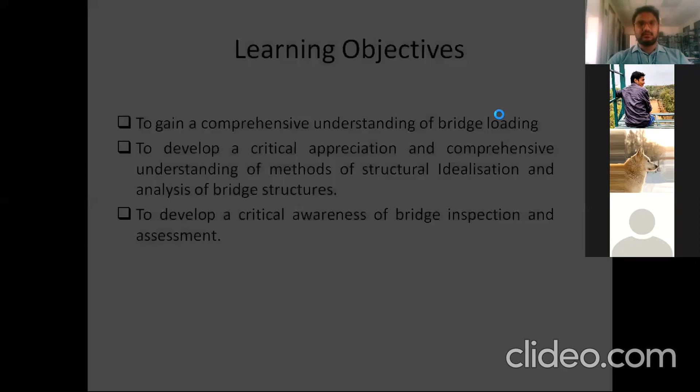The learning objectives I would like to share today: through this course, we can gain a comprehensive understanding of bridge loading, and develop a critical appreciation and comprehensive understanding of the methods idealized in structural engineering, so you can analyze bridge structures. We will also develop a critical awareness of bridge inspections and assessment. By having these principles of bridge engineering, you will have awareness of how to do inspection of bridges, how to assess bridge structures, bar bending schedules, rebarring of bridges, and the structural elements of construction.

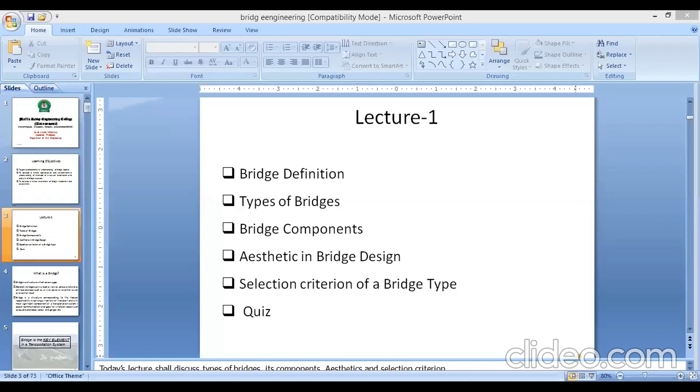So in today's lecture, we'll have the definition of bridge engineering, what are the different types of bridges available, bridge components, aesthetics in bridge design, and the selection criteria of bridge type - on what basis we are going to select bridges. Finally, we will have a quiz question, and through that our lecture will be finished.

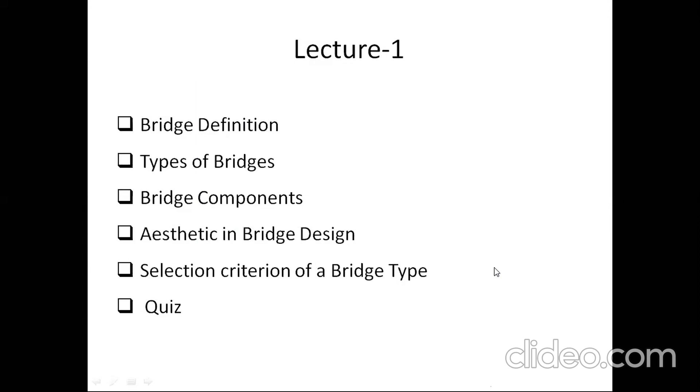What do you mean by bridge? How do you define a bridge? A bridge is a structure which covers a gap. Generally, a bridge carries a road or railway across natural or artificial obstacles. So a bridge is a structure which covers the gap and acts as a medium laid over an obstacle, such as a river, canal, or other railways or roads. That is how a bridge covers a gap.

A bridge is a structure corresponding to the heaviest responsibility, which carries a free flow of transport also. So bridge plays a vital role in terms of transportation, such as in case of communication, or covering gaps of different obstacles like valleys and gorges. That is how bridge plays a vital role in terms of transportation.

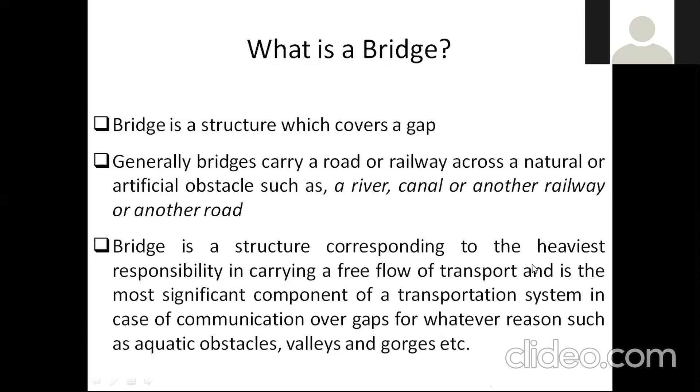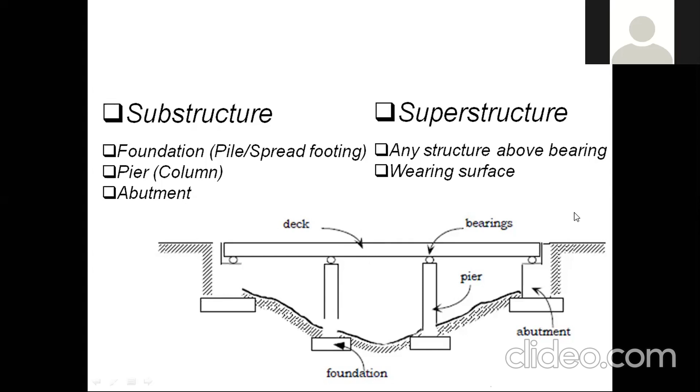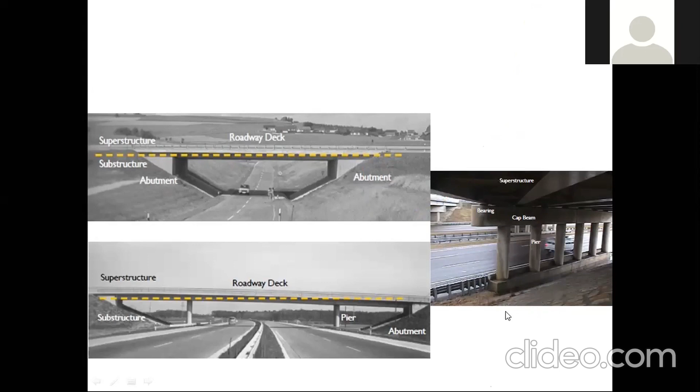This is called a pile cap. Below that, you might have a pile or you might have a raft. If you have a raft below the ground, it will be called a raft cap.

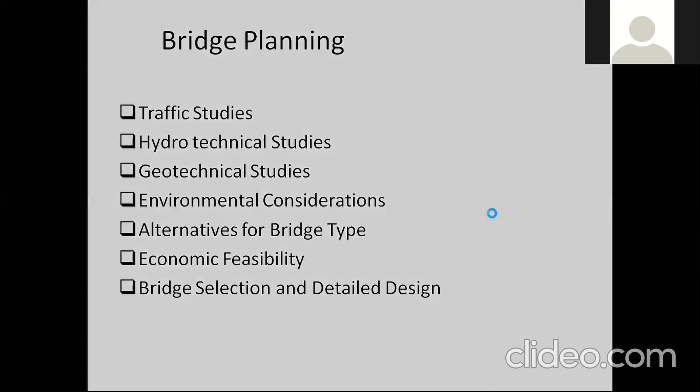So here you can see - this is very important.

Medium span is 30 to 100 meters, and long span is greater than 100 meters. Bridges having less than 6 meters span are treated as a culvert, and spans greater than 6 meters are treated as bridges. So all our culverts will have a span less than 6 meters, whether it's a box culvert, pipe culvert, single cell, or double cell box culvert.

So in that way, culvert is defined as having a span less than 6 meters. Bridges are classified based on the span also.

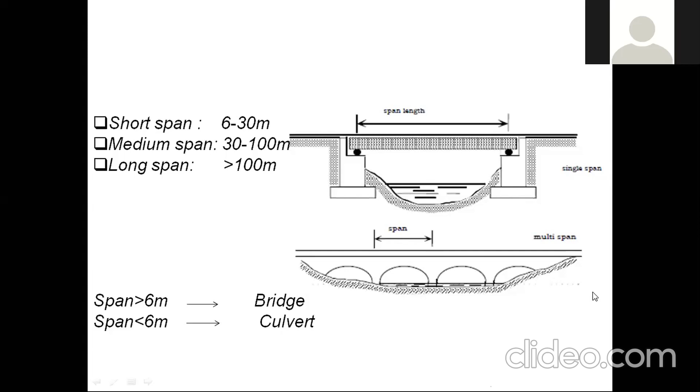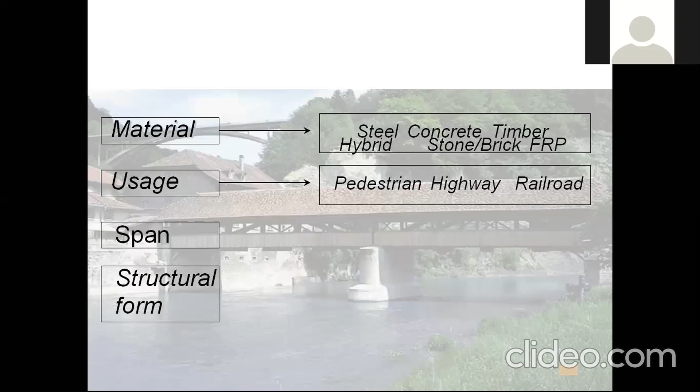The other one is usage. Based on the usage, you can call a bridge by different names - pedestrian bridge, highway bridge, railway bridge, river over bridges, and so on. Based on the span, you can classify bridges as short span, medium span, and long span bridge.

Coming into structural form, bridges are classified based on the structural form. If the bridge has only a slab without a girder or any beam, it's called a slab bridge. There will be a girder bridge, truss bridge, arch bridges, suspension bridges, cable stayed suspension bridges. These all come under the structural form.

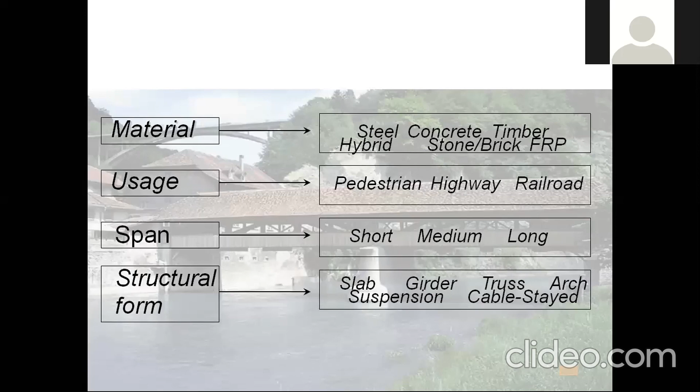See the material and fabrication. The materials used, as I mentioned, include masonry, timber, naked timber bridges, RCC, and pre-stressed concrete bridges to have long spans. Steel you can use, and composites also you can make use of to have a bridge.

What do you mean composite? It's a combination of steel with concrete. Apart from rebarring steel, you can make use of steel sections with the concrete to make a composite structure. And coming to fabrication, it can be done in the form of pre-casting bridges and cast in place, where the bridge construction takes place at site.

There are also pre-tensioned bridges, post-tensioned bridges, prefabricated bridges, and riveted bridges, where the bridge is going to be a permanent, bolted structure like steel and timber. So that is how, based on fabrication and materials, your bridges are classified into different types.

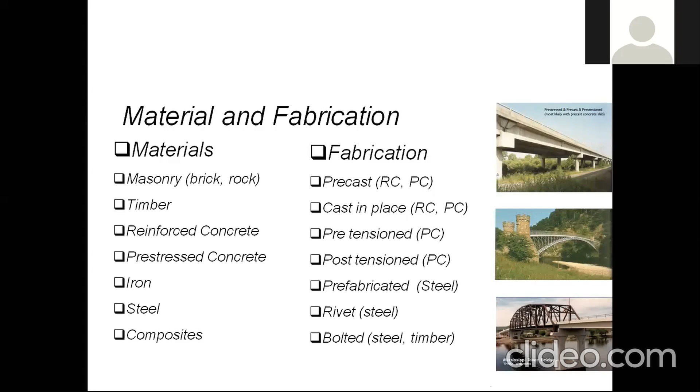And coming to highways, see these are examples of the highway bridges. This is how highway bridges look like.

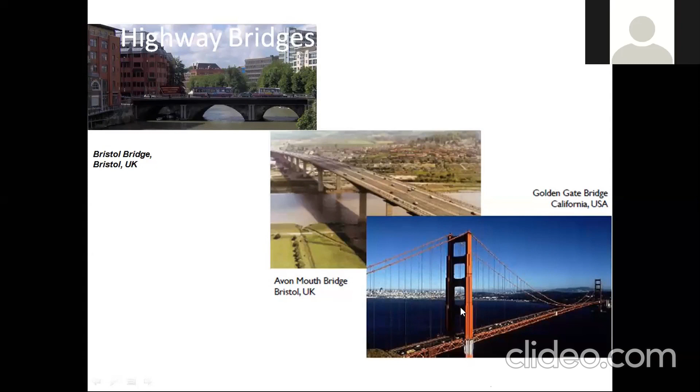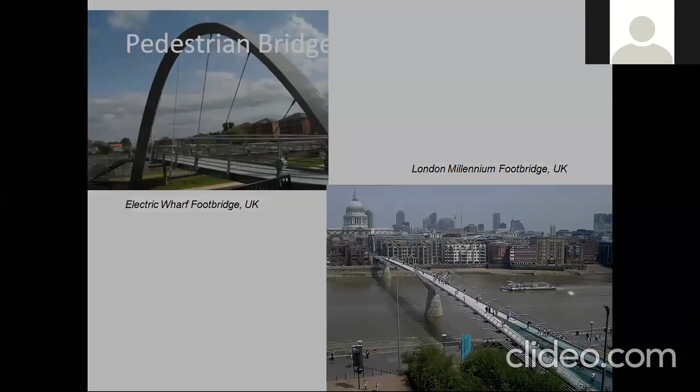Right, see the next one. So this is the pedestrian bridge. You can see the pedestrian walk bridges like this. These are a few examples of pedestrian bridges and railway bridges.

Railway bridges. So here you can see the steel railway bridge. At the bottom line, you can see this masonry stone arch bridge.

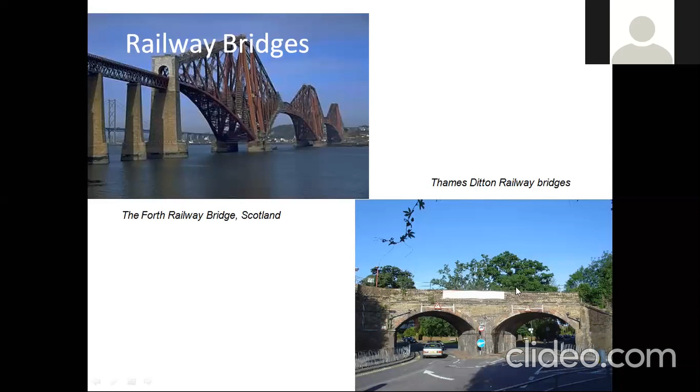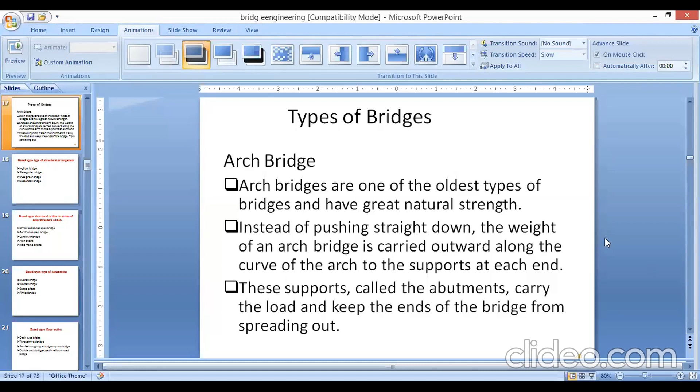Beam bridge - there will be a beam which is resting, which is supporting your deck. That is called a beam bridge.

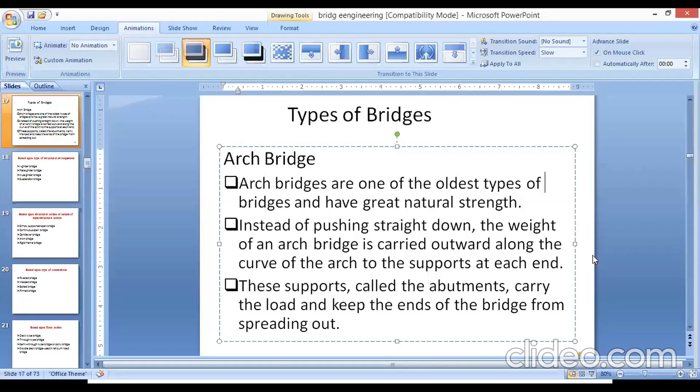From the crown portion, the load transfers to the support in the form of an arch action. The supports are called the abutments, where the load transfers to the foundation. In arch action, loads transfer to the abutments right away, which carry the load and keep the ends of the bridge from spreading. That is basically how arch bridges look, and how they transfer the load.

Based upon types of structural arrangements, bridges are arranged into I-girder bridge, plate girder bridge, truss girder bridge, and suspension bridge. Basically, bridges are classified into different types based on different categories, or different types of functionalities. The first one is bridges classified based on the type of structural arrangement - how you arrange the structure, all based on its application.

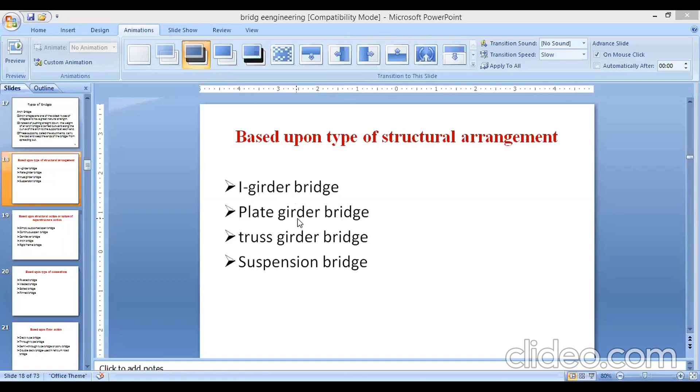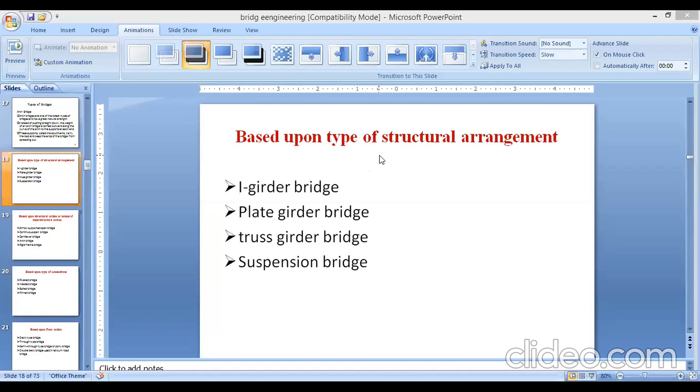Let's see the I-girder bridge. This comes under steel structures, where I make use of an I-steel structural element as a girder. In plate girder bridge, you will study this as your fourth module in steel structures, where you'll learn how to design the plate girder. The truss girder bridge is a composite structure having different truss, strut, and tie members. And the suspension bridge - this is how, based on the type of structural arrangement, bridges are classified.

The next classification is based on the structural action, or nature of superstructure action. Based on the action also, bridges are classified. The first one is simply supported span bridge, where it is supporting on two supports. Continuous span bridge, where it is supporting on a number of supporting actions - if your bridge has different piers, it can be called a continuous span bridge.

A cantilever bridge, where one end is fixed - it can also be movable when you have a pin support at one end. If you have a fixed support at one end, it can't rotate, so it can also be called a cantilever bridge. And the arch bridge, based on arch action, and the rigid frame bridge. These are the different types of bridges available based on the structural action or nature of superstructure action.

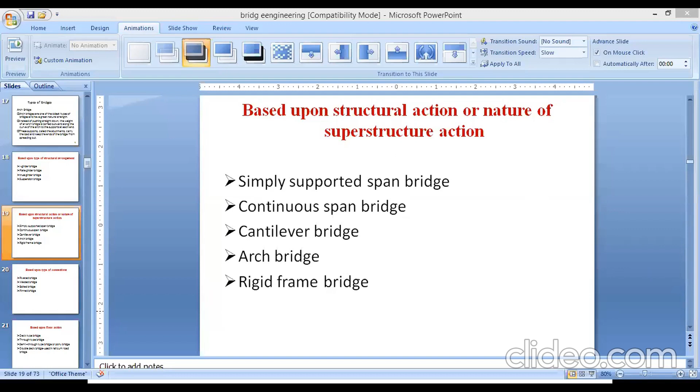Let's see the next one - based on the type of connections. As we are well aware of different types of connections, bridges are also classified this way: riveted bridges, welded bridges, bolted bridges, and pinned bridges. Riveted bridge is a permanent bridge, welded bridge is a permanent bridge, bolted bridge is a temporary bridge, and pinned bridge is a temporary bridge. Rivet and welding both are permanent, and bolting and pinned are temporary. That is how bridges are also classified based on the connection.

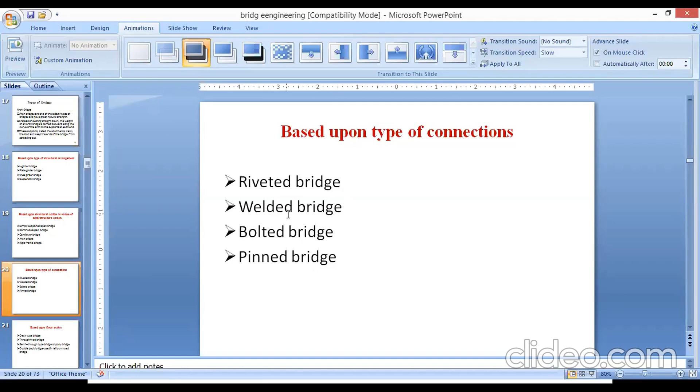Based on floor action - how your deck is subjected to load - bridges are also classified. One is the deck type bridge: if you have a deck alone, it falls as a deck type bridge. Through type bridge is where it allows passage from one place to other, so the bridge having access from one place to other place can be called a through type bridge. There's also semi-through type bridge, or pony type bridge - I will show you some pictures of how these look.

So in that way it's called a double deck bridge, which will accommodate both roads and railways. So in that way your bridges are classified based on the floor action.

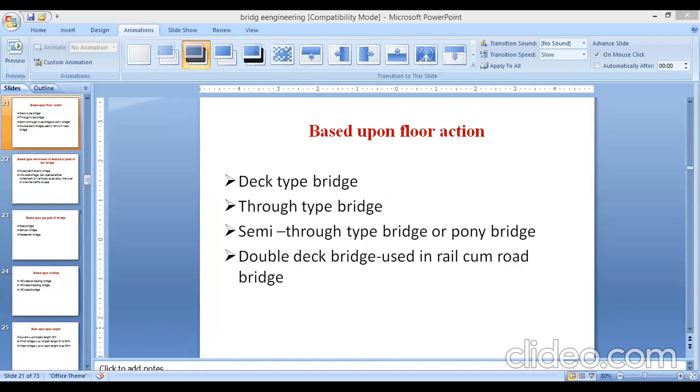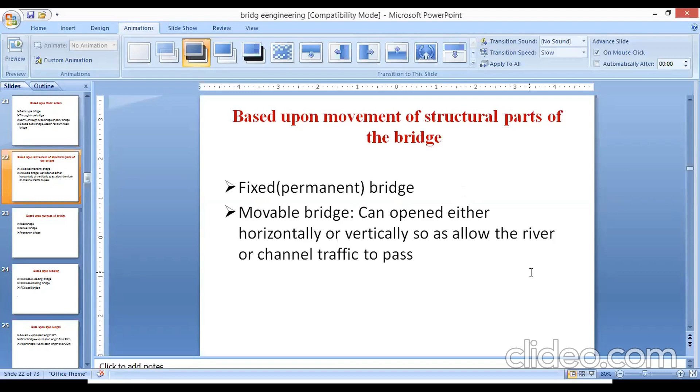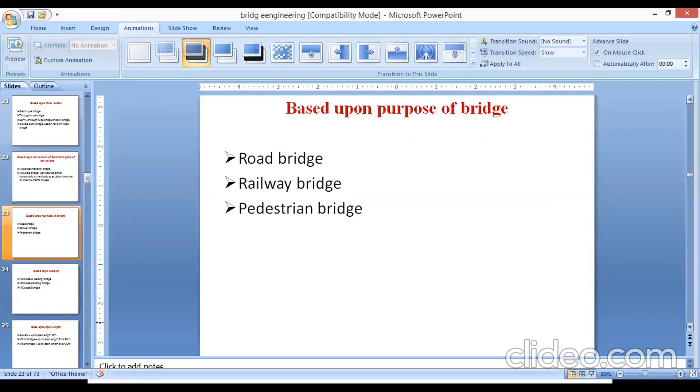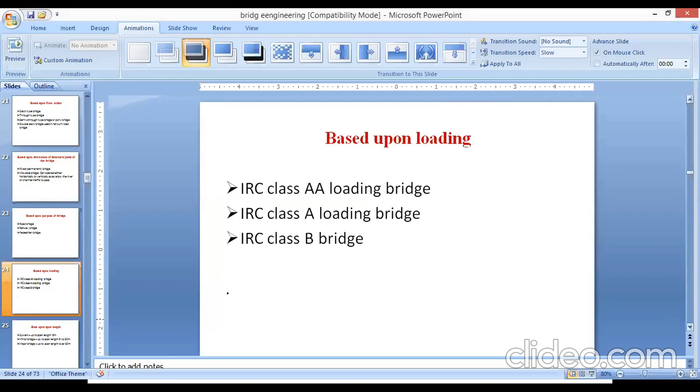So this is how bridges are basically classified. It's not just like a road bridge classified on simple function alone - it's based on span, based on function, based on usage, based on application. So bridges are classified on different factors. Now I would like to show you some pictures on each bridge.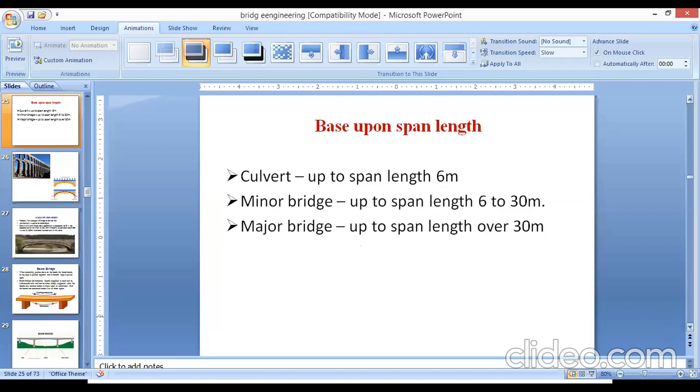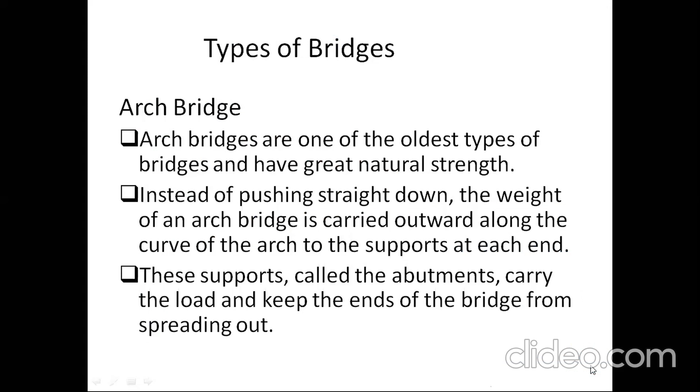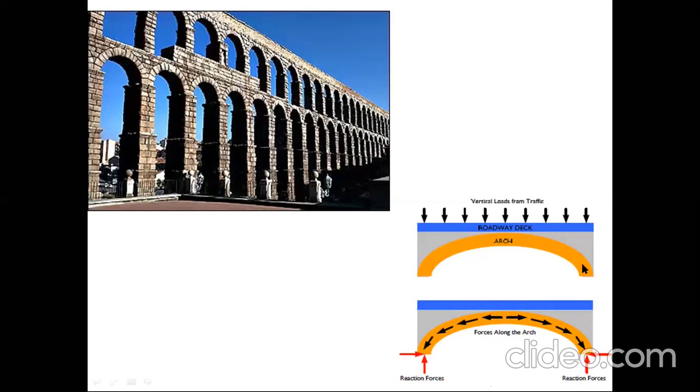Here you can see the arch bridge, where you can see the arch action of the bridge. You can see how load transfers from the arches to the abutments - forces along the arch, and this is the road deck. This load transfers to the arches, which carry the forces and transfer them to the abutments. So this is how arch bridges look.

And see the masonry archway. So this is the masonry archway. Basically, this masonry archway will have a span in and around 3 to 15 meters. This is probably the first category of bridge involved in olden days. These bridges are aesthetically superior to slab bridges, and even their look is very nice.

The arch-shaped slab supports on two opposite walls, and it can adopt earlier for small spans of 3 to 15 meters of its masonry action. So that is how you can even extend it up to around 305 meters in concrete, which has been built in the world. So even for half a kilometer of length, bridges can accommodate transportation.

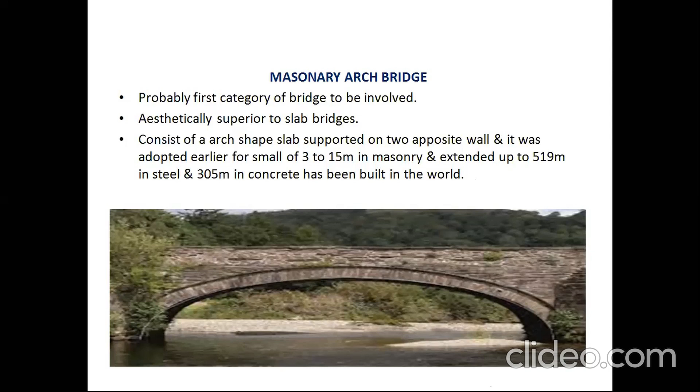And you can see the beam bridge here. So basically, you all know the beam action. The bottommost layers will be subjected to tension, and the topmost layers will be subjected to compression. That is how the beam action takes place for beam bridges.

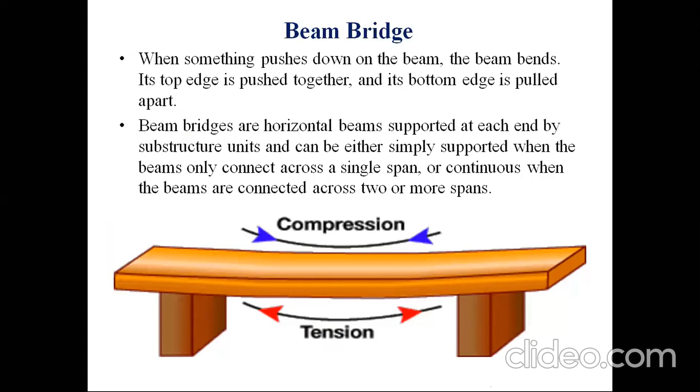So basically, in beam bridges, when something pushes down on the beam, the beam bends - the top edge is pushed together, and the bottom edge is pulled apart. That is how the beam action takes place. Not only in a single span bridge, but even in continuous bridges, the action will be the same, across two or more spans.

So let's see the next one, which is a beam bridge again. I think you've all seen these kinds of bridges. There are two piers and two abutments - actually, there are four piers here. This is called the pile base, and this is called the pile. Basically, piles will be below the ground. That is how the structure usually looks like, and this is the deck.

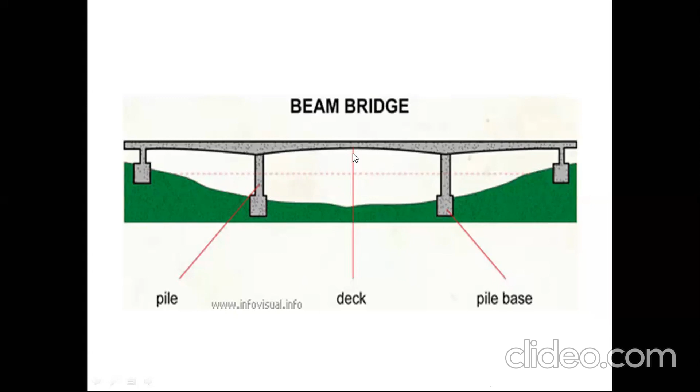And this is called a pipe culvert. We call these culverts where the span is less than 6 meters. You've all seen these kinds of culverts, right? The culvert usually will be with a pipe, or sometimes with a single cell or double cell pipe culvert. These culverts are suitable for cross drainage flow, so that is how people provide pipes for the cross drainage flow.

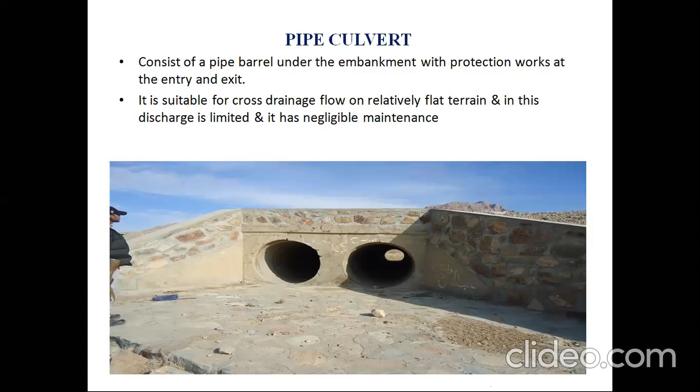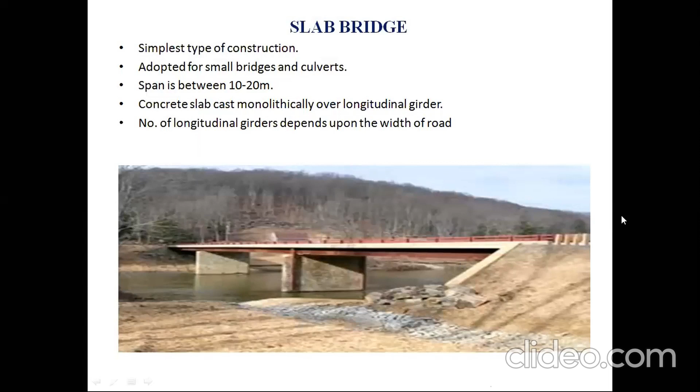And plate girder bridge - this is what we are talking about, which is related to your steel structure. This is something like a plate girder which has more depth. You can see a huge girder here, made up of an I structural element. This I section was prepared with the help of plates, forming an I section. Such a big member, having more web depth, needs to be stiffened with the help of a web stiffener.

You can see there are multiple stiffeners provided vertically. They are called web stiffeners, used to control web buckling due to shear. That is how the web is supported with web stiffeners throughout its longitudinal length. Basically, these plate girder bridges can accommodate a span of around 10 to 60 meters, and for continuous bridges, it can go up to a quarter of a kilometer, 250 meters, in continuous construction.

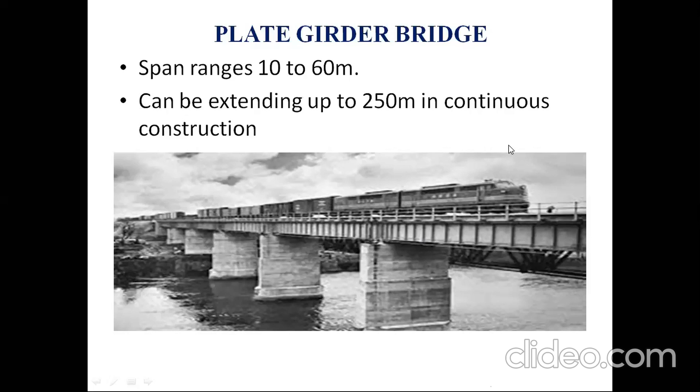And truss bridge - I think you can see the truss bridge here. The span can be 30 to 375 meters in the simply supported case, you can accommodate a truss bridge. See, up to around 550 meters without any support, you can have a truss bridge.

Here, each individual member is subjected to tension and compression. There are a lot of bracings on the top and even on the lateral sides of the section. And you can see the I section which is supporting the deck. So this is how the truss bridge looks like.

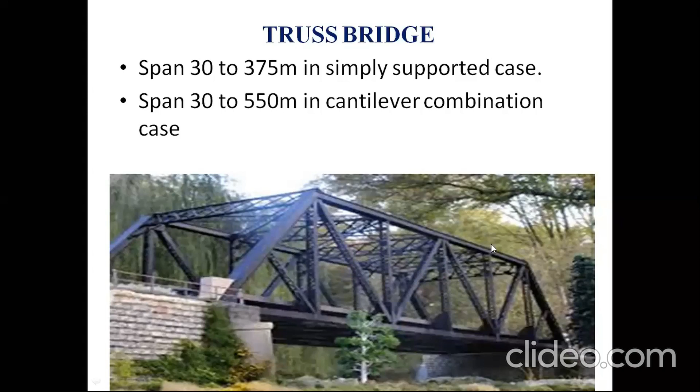If you are good enough in designing steel sections, you can even design truss bridges with that steel knowledge. All these elements seen here are laterally supported in the form of lacing - you can see the lacing for these sections here. So this is how the truss bridge looks like.

And the next one is suspension bridge. You all have seen this, right? So there is a big confusion between suspension bridge and cable stayed bridge. Both are different. Suspension bridges and cable stayed bridges are different.

So here the deck is completely suspended with the help of tension members. These members are called cable strands, and these vertical pylons are called stanchions. They are made up of high tensile steel cable strands in the form of a catenary, to which the deck is attached by steel suspenders, which are made up of steel rods or members or cables. That is how the bridge is supported.

So the bridge which was recently constructed in our Hyderabad, near Inorbit Mall, Durgam Cheruvu, is not a suspension bridge, it is a cable stayed bridge. So there is a difference between cable stayed bridge and suspension bridge.

So basically this suspension bridge can be made of timber or concrete, steel also can be used, where the load transmission takes place to the suspenders.

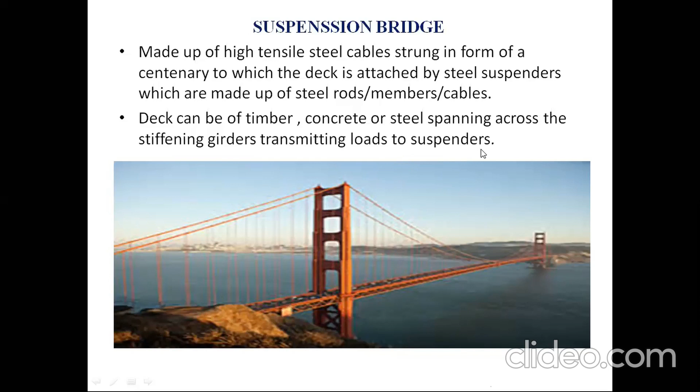See how the forces are transferred from stanchions to cable, from cable to strands, from strands to deck. You can observe here, every strand is subjected to tension, and even the major cable is also under tension. Your stanchion is subjected to compression, and your anchorage is also subjected to tension. So you can see a lot of elements here are all subjected to tension, only the vertical pillar is subjected to compression.

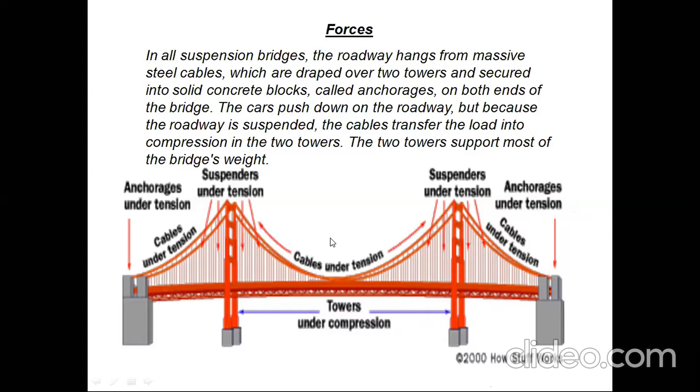So even you should know the load transformation in the bridges. So the other picture is focusing on...

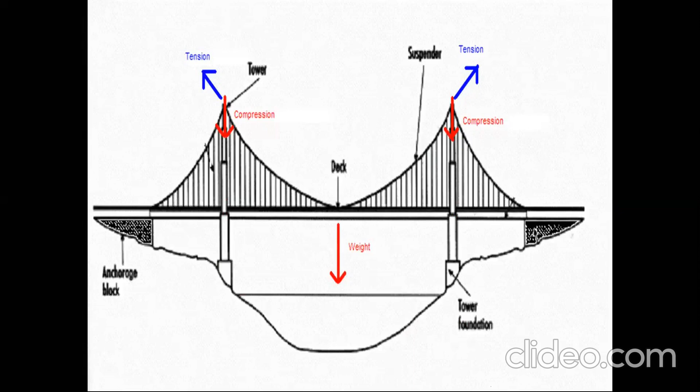So this is what a cable stayed bridge looks like. I think this is the bridge recently constructed in our Hyderabad by L&T. So cable stayed bridges also look like suspension bridges, but the difference is in the way they are supported. Based on that, cable stayed bridges are quite different from suspension bridges. Less cable is required and the towers holding the cables are proportionately shorter. In suspension bridges, you require more cables to suspend the deck, but in cable stayed bridges, limited cables are enough to suspend the bridge. And it can accommodate long spans, in and around 100 meters to 200 meters.

So this is an example of the suspension and cable stayed bridge, and this is what it looks like.

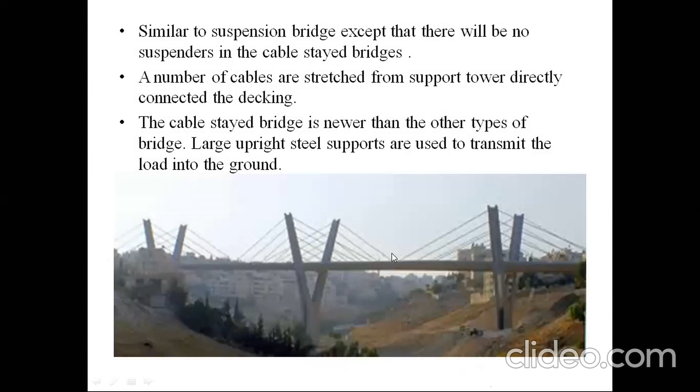Next one is cantilever bridge. A cantilever is a bridge built using cantilevers, structures that project horizontally into space supported on only one end. As we know, a cantilever always has maximum bending moment and shear force towards the support, so the section also should be more towards the support.

In that way, you can see this is the support location. At this support, the section is too high, and towards the center, the section is too low. So one end is fixed, the other end is free at the center, this is the fixed support, and that center is the free end. This is how cantilever bridges function.

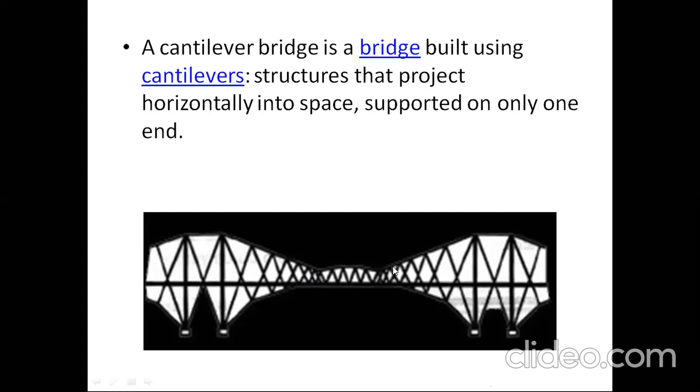So the practical example of a cantilever bridge over here. You can see this is a fixed support and this is the free end, and this is the suspended span. See how this suspended span is suspended with the help of the cantilever arm, this is your cantilever arm. So towards the support, the section always will be more, because that is the portion where the member transfers loads to its support.

And this is the anchorage arm, which is anchoring in the sense that it supports this cantilever action.

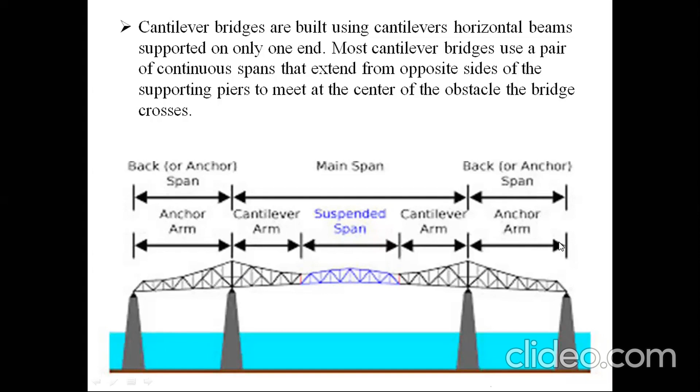You can see even the arch bridge, it's a steel arch bridge. Earlier you have seen masonry arch bridge, so here it is a steel arch bridge.

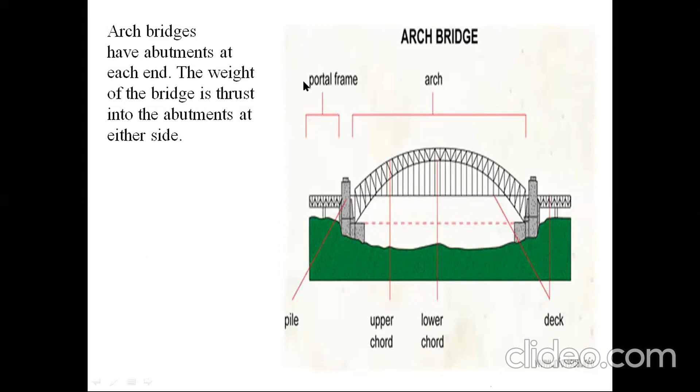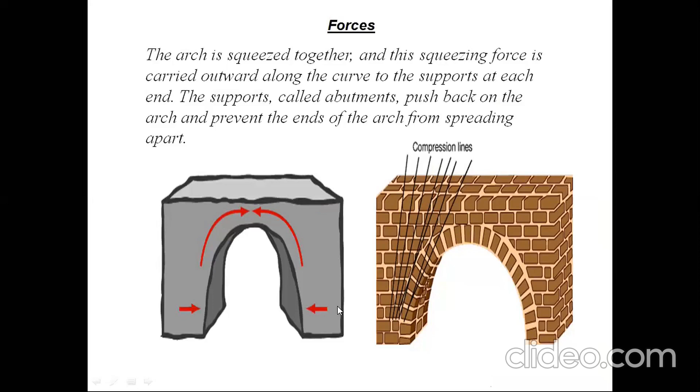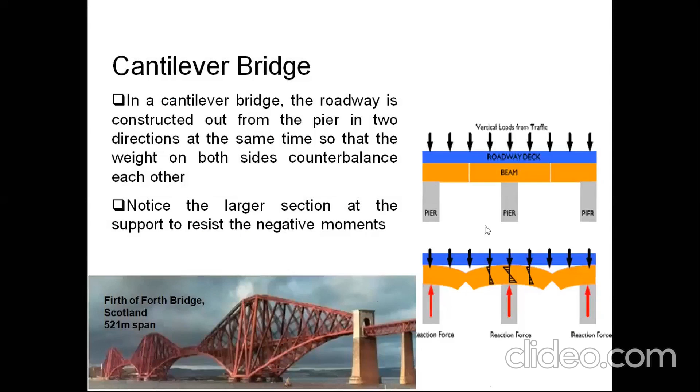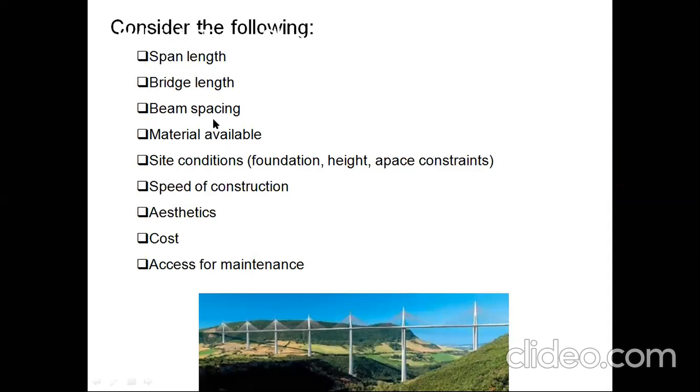So, beam or girder bridge, cantilever bridge, suspension bridge - again, different types of bridges. As I told you, bridges are basically classified based on the span, based on the length, based on the spacing, based on the materials, based on the site conditions, based on the construction speed, based on the aesthetical look, based on the cost, and based on the maintenance. These are the considerations before you place a bridge over there, right?

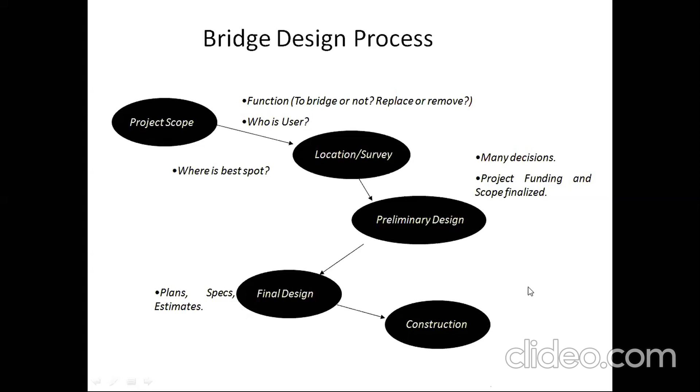Okay, so that is how your preliminary information to know best about bridges.

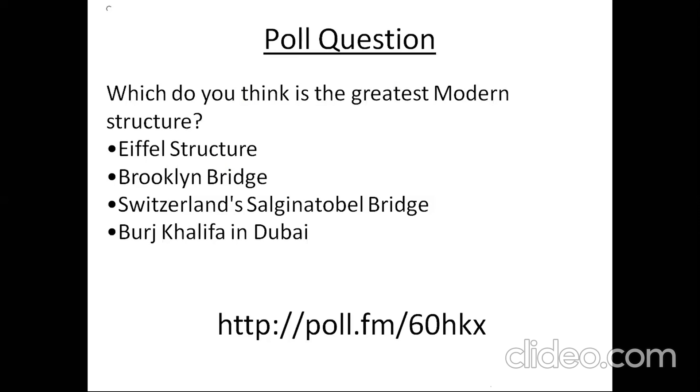So here there is a poll question. I request the students to please answer this question: which do you think is the greatest modern structure? Out of the listed ones, I would like to put a question to you guys - out of these four structures, Eiffel Tower, Brooklyn Bridge, Switzerland's Salginatobel Bridge, and Burj Khalifa in Dubai - which is the greatest modern structure you consider? I'm not just talking about a great structure, I'm asking you greatest modern structure. You can answer me this question in your comment box, so that I can look into it. I want the fast responses, guys. So, which do you think is the greatest modern structure?

Guys, are you answering? Put in your comment box so I can see all of your answers. Okay, altogether 27 participants are live. Okay, good, good. Eiffel Tower, Brooklyn Bridge, Switzerland Bridge, or Burj Khalifa. Yeah, people are answering - Burj Khalifa is the modern bridge, modern structure. Okay, good.

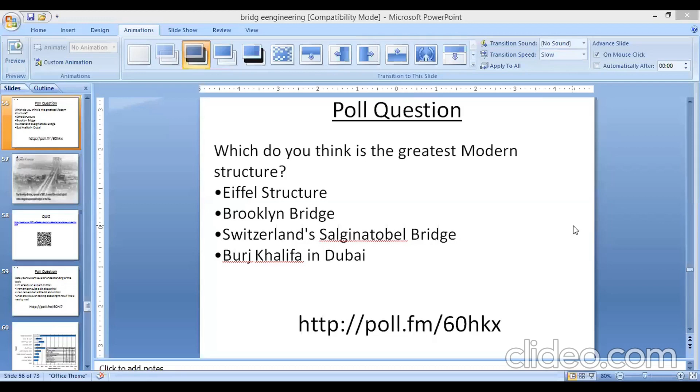So I'm unable to hear your voice - is it audible to everyone, guys? Is that only a problem with you, and you didn't write your name? It is XT1562. Is it audible to everyone, guys? Yes, sir, yes. Okay, so I think you have a problem, I mean in your system, so please correct it. Okay, right. Okay, you are answering good, so answer them, so by that we'll continue and finish it soon. And right, so let's see the answer.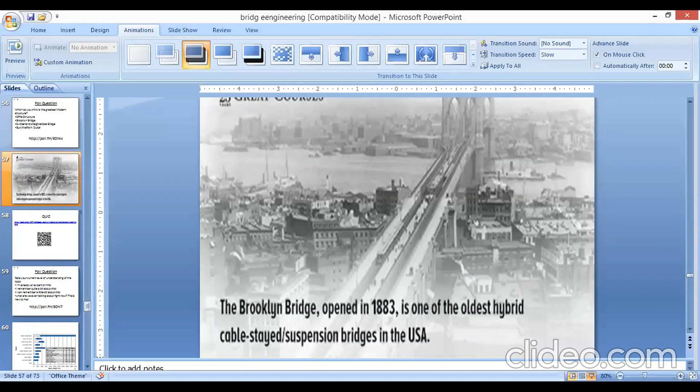So here, the modern construction bridge is Brooklyn Bridge, which opened in 1883, one of the oldest hybrid cable-stayed suspension bridges in the US. Why am I telling this is a modern structure? In everyone's perspective, what did you think a modern structure means - recently constructed? But in my point of view, a modern structure is one which is still under functioning, which was constructed many years ago. In 1883 it was constructed, and still this bridge is under usage - the oldest hybrid cable-stayed and suspension bridge. So in my point of view, modern structures are the ones constructed many years ago and still in function. So by that, the Brooklyn Bridge is the modern structure which is still in usage in the USA.

So I think many of you got confused, but that is my perspective, guys. Burj Khalifa was constructed just 10 years ago, but see the bridges which were constructed even 100 years ago, still they are in usage. We should treat them as modern. So that is a big challenge to our design engineers nowadays.

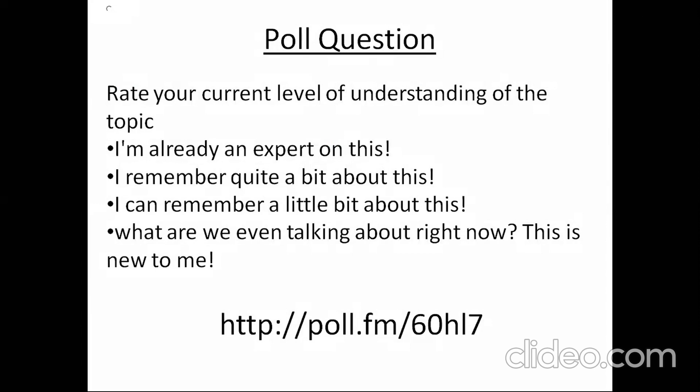Okay, and the other question, I think it's a poll question based on understanding. Let me see that. Guys, you can answer this question also, so it will be a bit encouraging to us, and we can improve a lot based on your understanding.

Rate your current level of understanding of the topic: I'm already an expert on this, I remember quite a bit about this, I can remember a little bit about this, or what are we even talking about right now?

So what are you feeling? Is this information on these bridges already known to you, or is the information I shared unknown to you? You can answer any one of these in your comment box, so I can go through and try to get more information which a few people don't know. You can answer this question as well, in parallel.

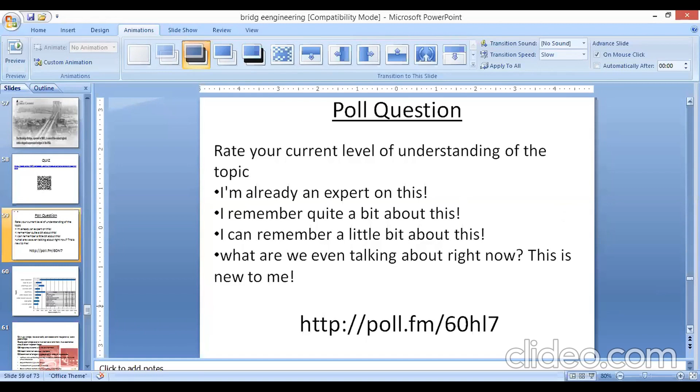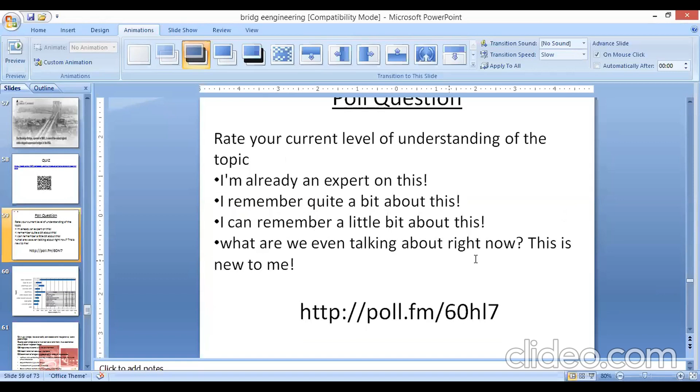The options are: already an expert on this, I remember quite a bit about this, I can remember a little bit about this, and what are we even talking about right now? This is new to me, right?

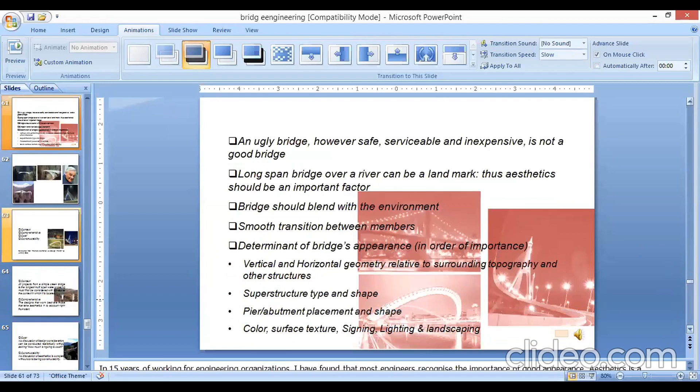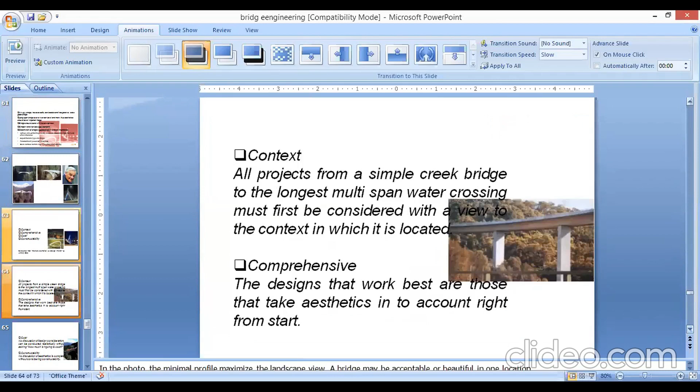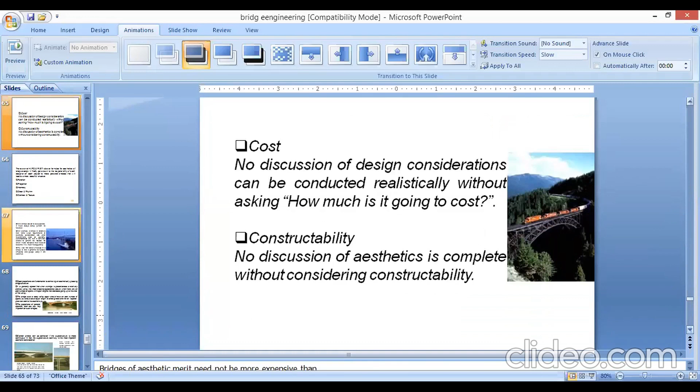There are a few more slides talking about different construction processes, how they are going to be constructed, and how environmental factors play a vital role in designing the structures. That is how all the different structures are located here. I will share this PPT where you can get information about the bridge, and the construction takes place with a lot of parameters like cost, constructability, function, proportion, harmony of the structure, and fastness of the structure. All this comes into the picture.

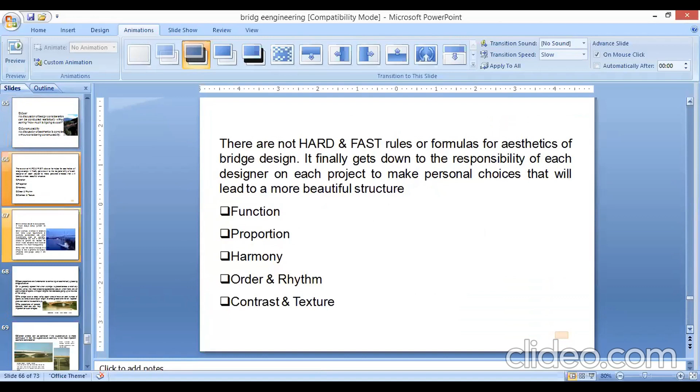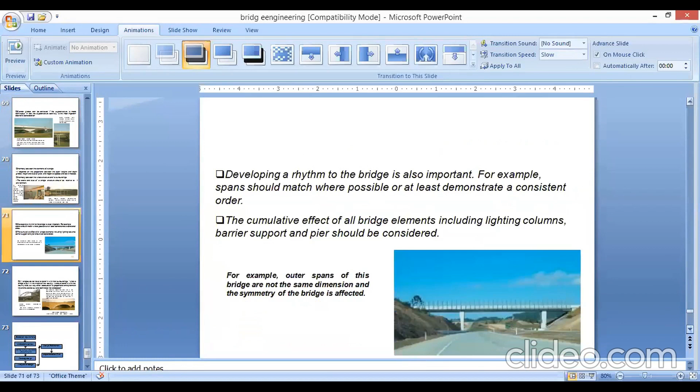I would like to share this PPT to you, but our major role is to complete our syllabus within the time. So in the next presentation, I will come up with topics on steel structures where we finish our fourth and fifth module within the time. I hope this first interaction was a better opportunity to share this information with you guys. In the meantime, I would like to share a lot of videos based on forensic engineering, plastic analysis, and elastic analysis of structural designs as well.

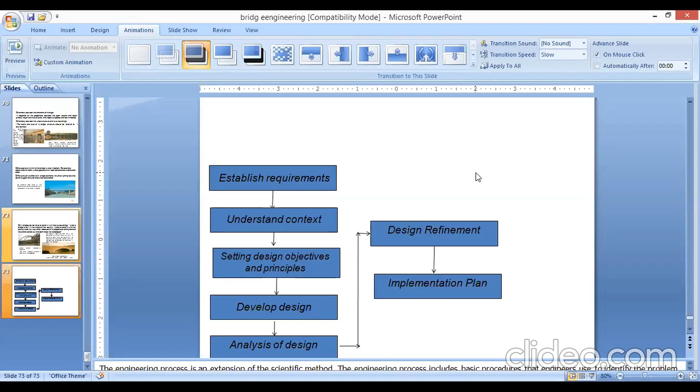That's it guys, this ends the presentation. We all are going to meet again next week based on the timetable given by our coordinators, right?